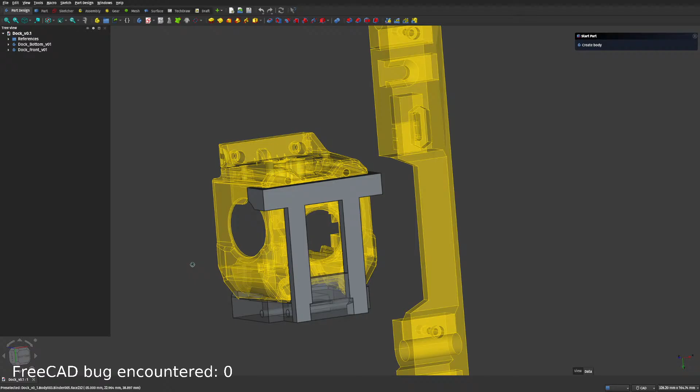Wow. Yeah, get rid of that. I can deal with this. Okay, now need to grab. Go with that, let's go with that. Put it over there.

Do I merge them? Actually, let's try that again. Let's try this, what's gonna be? I do have a backup plan.

Where's it from? Not ever. Unify. Apply. Fusion. Yep, that's good, so we're gonna get rid of these 2. Yeah, looking good. All that is merger. Merge. Mono, single piece. That was a cool sounding name.

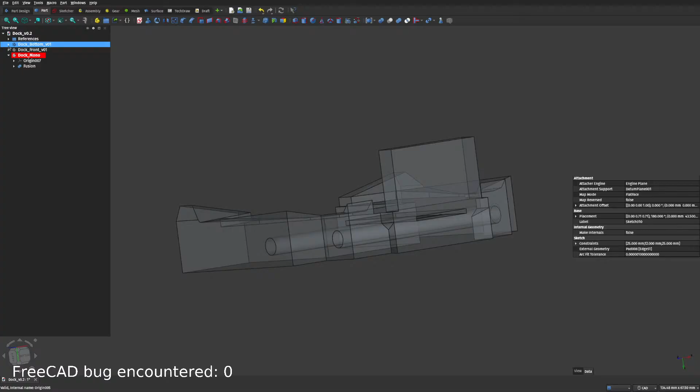to what, number one, and make it 30. Yeah. Dun, dun, dun, dun, dun. Let's see that way, put that one out. Yep, perfect. That way I can just mess with these two, and this one will automatically follow along, which is good.

Dum dum dum dum. I have no way to actually mute myself. We need it. Oh well. That actually could go bad.

What was that? Yep. That, I got away. I'm pretty sure neither of these actually on an angle. Or before that, make that 10.

And give myself some room to spin stuff around. Ooh yeah, like that, 9. And lower that a little bit. Okay.

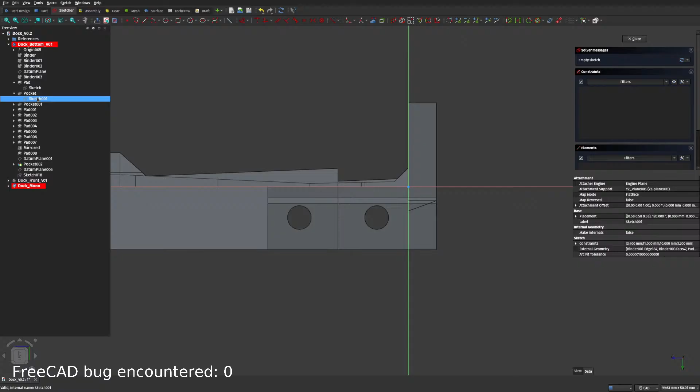Wait, how do you do that again?

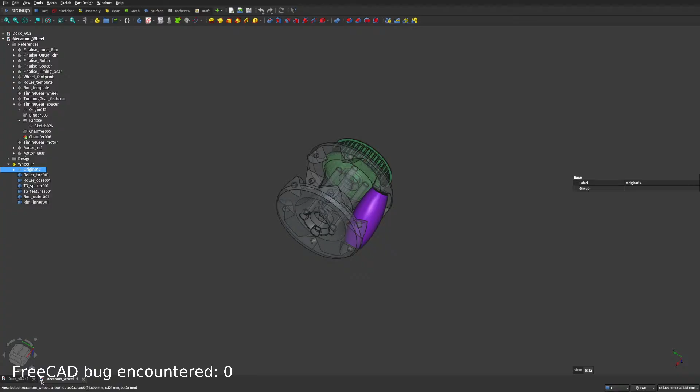For my case, though, I don't have a circle within a circle. I only have a circle at the very bottom. So I just do that. All right, that's good. All right, got it. I figured it out in the end. Okay, never mind.

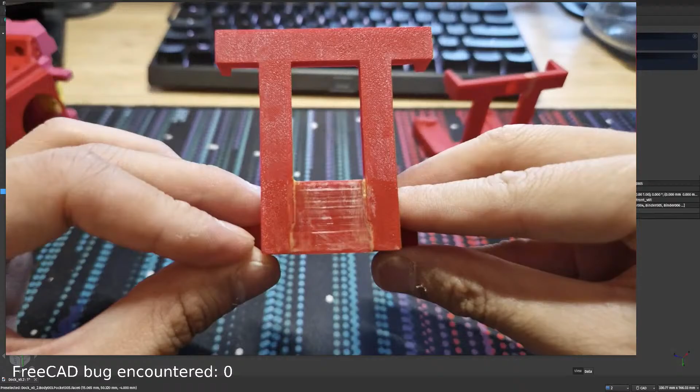So that piece goes on top of that piece. Those two are supposed to meet. And how they are going to be assembled together in the real world is basically just acetone glue. Well, acetone, not glue - acetone, but I put a bit of scrap ABS into it. So that's how this thing is glued together. Just paint on the edge, the interface, with a brush, and glue them together.

The problem with this thing is, as you can see here, these holes are not round, and that's a big no-no, unfortunately, because this thing needs to slide back and forth between two pins that go through this hole.

So yeah, I'm thinking maybe I can print this part still on its own, but in an orientation that will limit the amount of support needed for this whole structure, while still maintaining the fact that the hole you see here is a perfectly rounded hole. That's what I want.

Anyway, this is just a prototype. Speaking of which, maybe I should just print it out right now. Yep, so yeah, I think I talked myself into this just now. But let me go to the main screen there.

Oh, I forgot to add the slicer into this view. So give me a sec, need to capture the slicer. Prusa slicer. Okay.

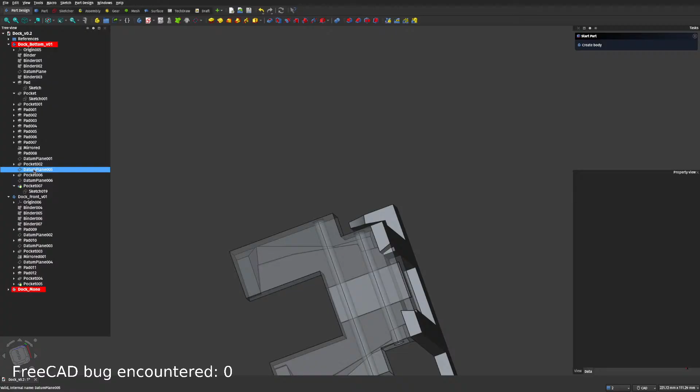So we punch that one through. The reason why we punch that one through is because we actually want— do we? Let me just think about this one really quick. Close, no, that one. Cancel. Yeah, this one.

So we're going to hold right there. It's less than 10 between that edge and that hole. So I don't mind, but I should be able to put a hole right there on that face without touching these two, right? Right.

Wait, but where do I want to go? Because the top is super thin already. Wait, no, that just shouldn't matter. Doesn't matter, and the reason why. Alright, so M4, 3.

I want to make a thing to clamp down the spring instead of relying on friction like it had been in V1, MissChanger V1. It didn't work too well in V1. I had to glue things in place after a while, which is annoying.

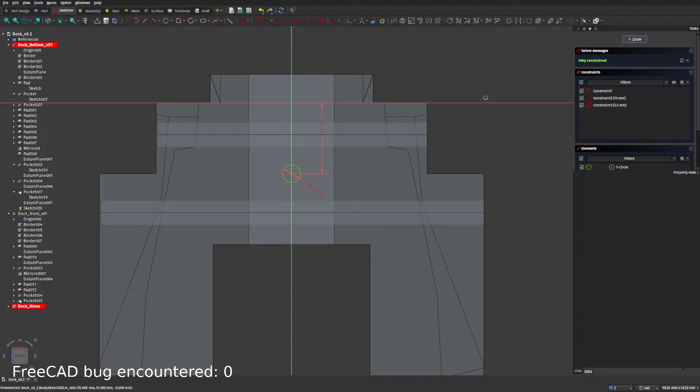Dimension. Make that in here, this doesn't have to be exact at all. Dimension that 2.5. In fact, I'm not even planning to punch a hole through using a normal hole punching. I'm gonna punch a hole with—

There's a police car outside. Hey, listen, it's better than the good old motorcycle road.

So that's better. Oh wait, no, that's still not better. No, clearance, correct it. No. And fine with tapped it. Yeah, they will, tapped it.

Hold up. Threaded, yeah, bro, yeah. 2.5, which sounds good. Yeah, 2.9. If we put 2.5, that means you have to cut the thread out with a threading tool, which is annoying. So let's not do that.

Now for the depth, it was 6.6, was it? 6. Oh, you need to be flat first. Flat. 0.6. 0.6 that, 0.6. It come through, right? Yeah, it came through.

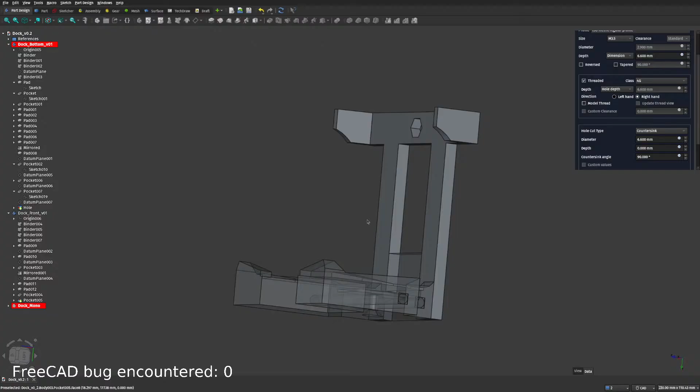Make sure to access the hole making thing first. Menu. Yeah. You don't want this to go up, I want this to go somewhere. So I'm going in the X direction. Plus 1, oh, -1.

Up to face. No, seriously, wrong one, wrong way. Are we going our first bug right now? I think I'm dealing with my first bug right now. Up to face, come on. Come on. Oh my god, it didn't take long, isn't it?

It's a bug, I can't extrude the other way, dimension. Reverse, no, yeah. Okay, up to face. Why would you not?

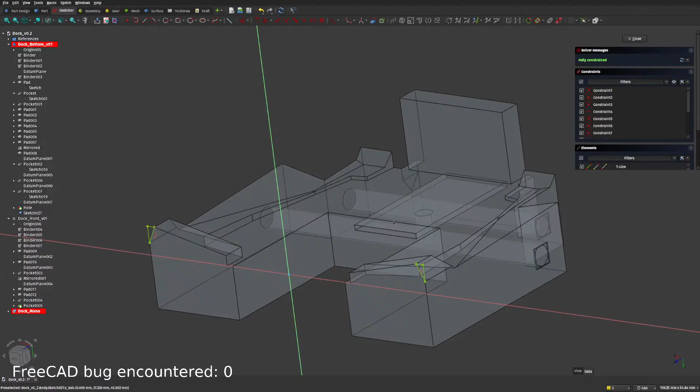What's this now? Alright, vertical. Damn it, no, I cannot do both at the same time. This one can go. Ooh, my, stop doing that.

That way, no, that way. Up to face, up to face. That face, there we go. Go, cool. Yeah, because there's 2 of these in opposite direction, so you can't.

Or should I? Can I mirror that? Just mirror that, I can't mirror that. But should I though? I don't want to, that sounds like a disaster waiting to happen.

Okay. Why is it on there? Is that not there? Oh, you screw you. Oh, wrong one, wrong one. Ow. Damn it. Steak.

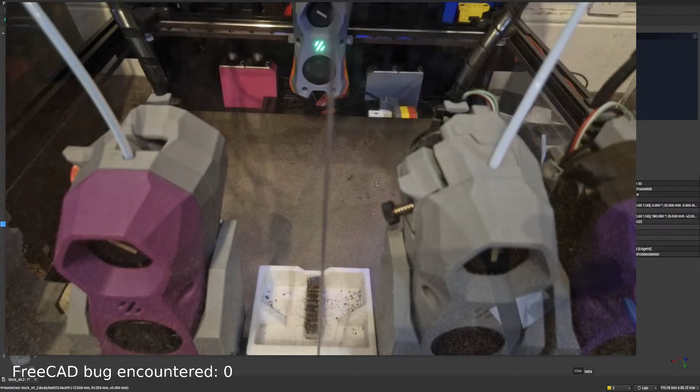Oh, thing is happening. Now, if I remember correctly, you can just go watch that while I keep doing what I'm doing.

Save that. I need to be 60. Okay, nice.

Okay, now, oop, I can see some problem brewing with the other. Yeah, no, that's good. Oh, all right, well never mind, it's doing its thing now. Yeah, heating up. Right, so while that's heating up, I'll just do this really quick.

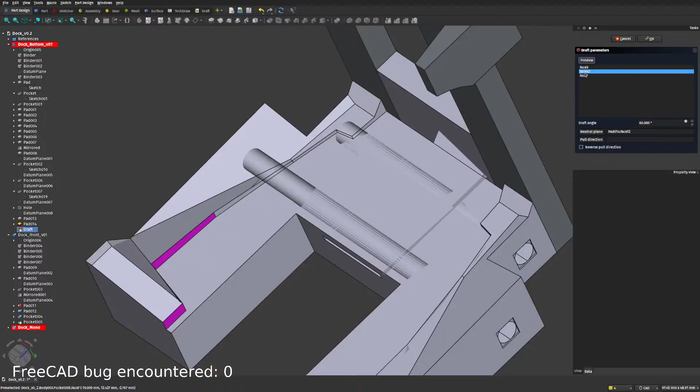Oh, it is doing stuff. Yeah. Alright, get back, get the team occupied. And now we'll preview this. Okay.

We deal with this? Maybe we could chamfer it. Just all around, mister. Alright, let me just watch it. Yep, it looks fine.

Yay, printing. Hey. Well, in case you're wondering about what I'm doing, I'm printing this thing here, the bottom piece. That's the plan for the next hour on that printer. Obviously, I'm not gonna have this display all the time, I'm gonna show up what the printer is doing with the cut. But yeah, that's that.

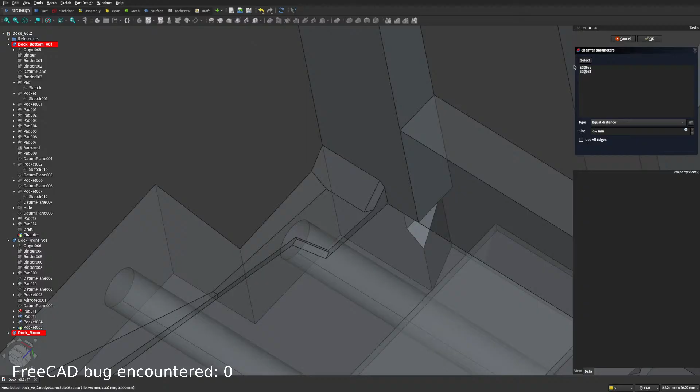Nah, small enough, let's not talk about it. But I'm not bothered too much. But I shall count that as a bug, because I cannot chamfer that edge there, right there. That edge right there, I cannot select and chamfer that. Which is stupid, but it's not critical. I can continue, but that's one point against FreeCAD now.

Alright, so like that on the edge as well, for symmetry. Perfect symmetry. Okay, that's not... yep, that's not.

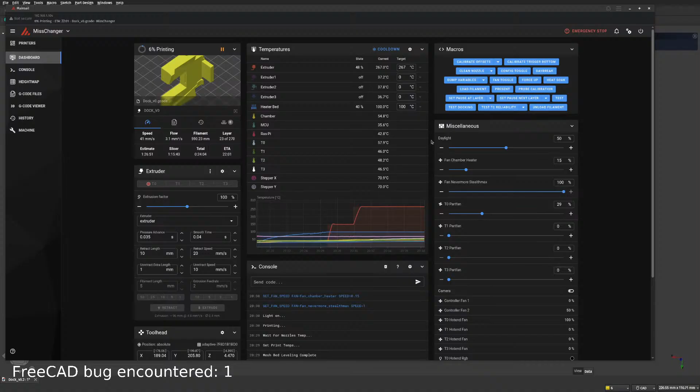Oh, cool. Right, this. That is out the way. We will do this thing here. Okay.

What? Yeah. 1.2. Did I see this glitching? So far, so good. Okay, good, I'm gonna grab that. Alright.

Select face. Yeah, okay. What are these? Oh wait. That one. Oops, oops, wrong face. Wrong face. You need to go to that one.

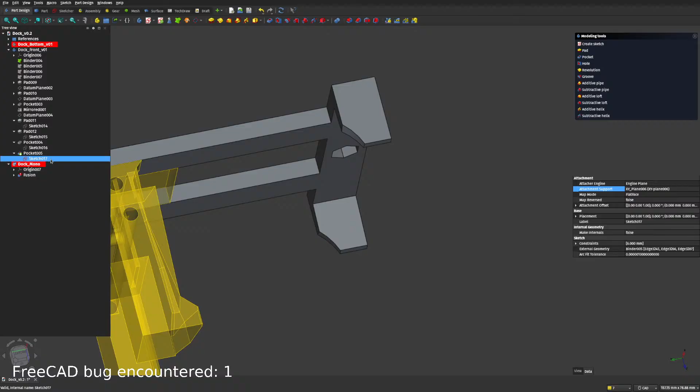Okay, looking good. After the triangle there, so that's fine. Wait, where's the cutout for that notch? I know it cut it already, but when is that? Oh, there you go. Yeah, it's fine, it's fine.

Right, so anything else I want to do here before I move on to the next thing, which is the thing that I'm still testing. Yeah, maybe chamfer this corner. Do I want to? Oop. Oh my god, I bought it. Yeah, that one.

Two, I mean, you look like ass. Yeah, I'll make it two. Keep it two, yeah. Trying to make it a little stronger, but without ruining this aesthetic on this thing. Okay, there we go.

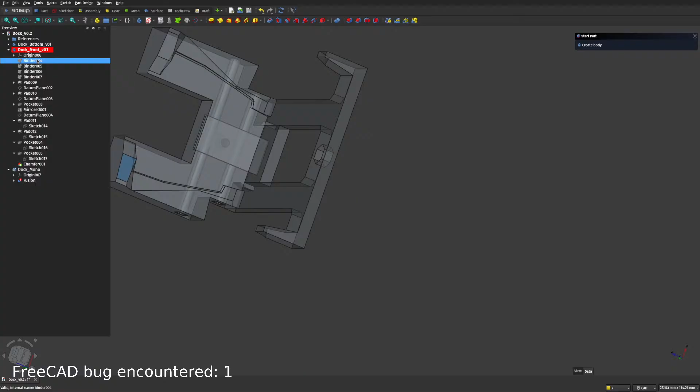And oh, right, totally forgot about this one. Also need to do that. Yeah, that one actually very important. That one is very important.

Alright, one mil is good enough. Do I want to chamfer the outside? No, I don't. We can do that, but not now. Yeah, we'll chamfer the edge of the face later when we really clear out. This is good.

Same time, that away. Why did this fusion break? I never used such tools in my life, so I don't know what's with this. I thought for sure that it would not break. Why are you broken?

Refine, true. Is this a bug? It's another bug, isn't it? Phase 2, yeah, all of them. Good. Why are you broken? Recompute? Okay. Recompute, what's this one? Recompute that one. No, okay. Oh, okay.

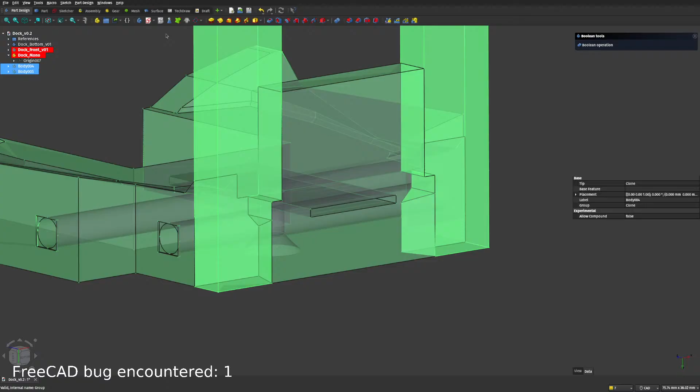Okay, so a boolean operation for you. Shit, alright. Whatever, we knew that, that's a bug. Let's lock it and move on. Yeah.

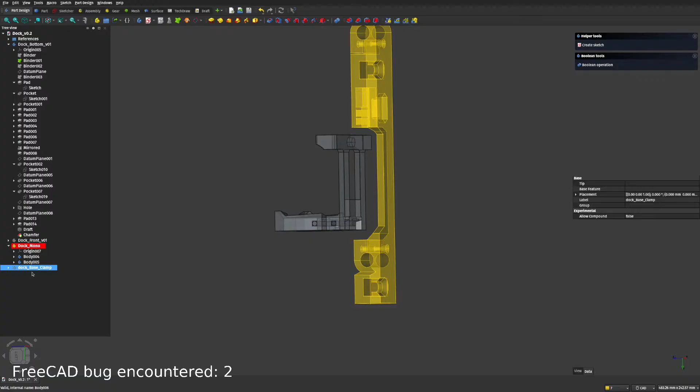Now we are, and we move that away, and that away, and that away. What I want from here for this guy is the holder, which I'm going to add in there. Oh wait, not from there, not from there, not from there. The holder, but from the assembly, yeah. Alright, yeah, that, like that, so it's positioned correctly on its own.

Then I want this one. Right out of the way. Do I dare to do this? Yeah, let's do this. Alright, so I'm gonna hide that. What's this? Ah, this didn't do anything. Okay.

Insert that. Alright, so grab that, and I grab that. There we go. Why did that? Okay, whatever. Right, so I want a little thing that connects right there, right beneath this thing. I'm gonna do that.

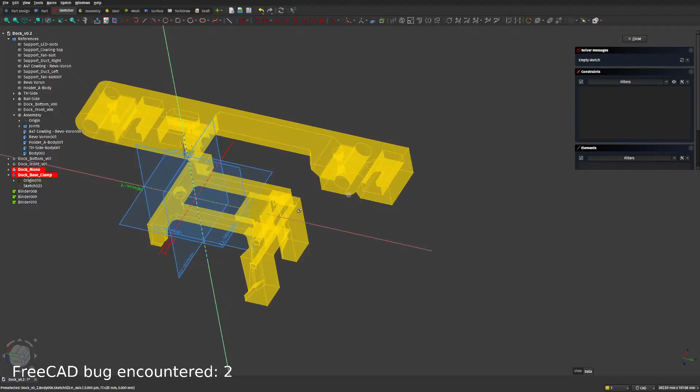Oh wait, no, why was it? Why was that outside? Oh, because I had this setup. Okay.

Correctly positioned. Alright, so before we connect the thing, drawing, wait now. Yep, something like that. There should be a pin in the middle, yeah.

So, and that, ooh my. Part. Up. I don't want this to be like that. Learn it the hard way. I don't want that. I want these two.

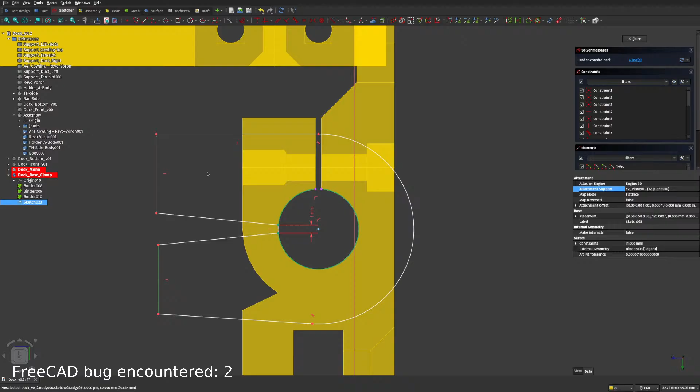Yeah, because if I extrude, because right now, if I extrude that, I'm just gonna have that really quick. And then let's show you what I'll do. Dimension that, yeah, just give it a random number. 10, yeah. Oh right, no, not yet. 8.

Yep, right. So the problem with this right now is in our design. If I can't, this is not going to print. Not the reason I'm saying that, because if I extrude this evenly, symmetry, yeah.

So the idea is something comes from here, I need to go up and attach to that one. Then it needs to be aligned with that.

Oh, this can actually still work, never mind. In fact, it makes things a lot easier the way that I'm going to do it. Let's get rid of that, get rid of that, get rid of that.

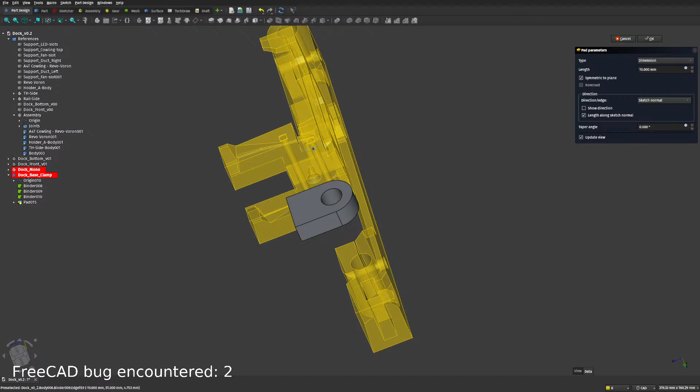Now I wish I had that camera back because I have some scribble going down. Yeah, no, I wanted to meet with this face. So that's 38, right? I think so. What is that?

I'm trying to avoid relying on this geometry. Set, close that.

Now, here is the deal. Because I need to make this thing a clamp, much like this at the back here, at the bar end here. We'll have the slot in between and a bolt going between them. That way it can actually clamp onto the round aluminum bar.

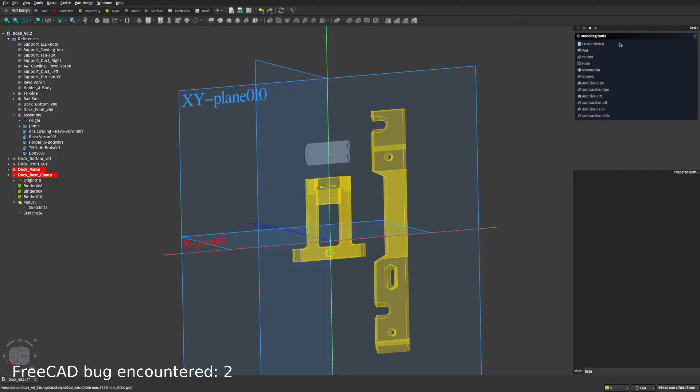Wait, it's not okay. Yeah, okay, so get rid of that sketch. The sketch is not gonna work. I'm gonna make a sketch here.

What does this look like out there? I think it's happening. Can't tell what the hell's going on, but I think it's happening.

Alright, where was I? Yeah, I'm gonna draw some stuff on here. So I need that.

Not sure I should do that. Let's see it. Second thought. No. Yeah, I couldn't think of any reason why this wouldn't work. So...

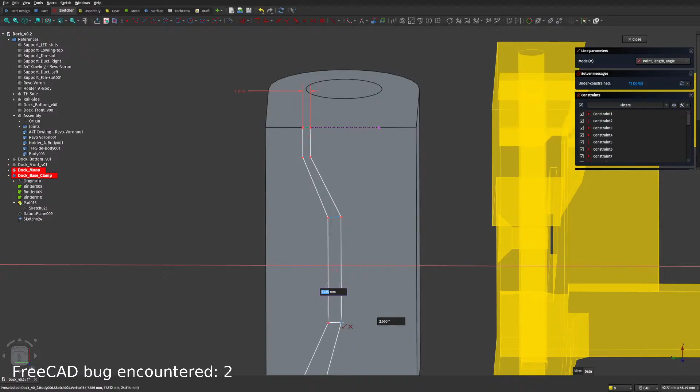Wait for one sec, I'm just gonna get it done quickly. So that...

Oh my, why are you? Yeah, 2, I saw that, but overall experience, pretty decent. I mean, I haven't quit yet. Haven't quit that yet.

Now what is constraint? 36, 34, 7. Oh, there's 2 of these, and it doesn't need to be. Oh, all right, there we go.

So, dun, dun, dun. Oh, what did I just do? All right, that was fine. And these, that one and that one, be equal. Now, there is between there and there, so I want to play with now.

And it broke. Okay, never mind. I will...

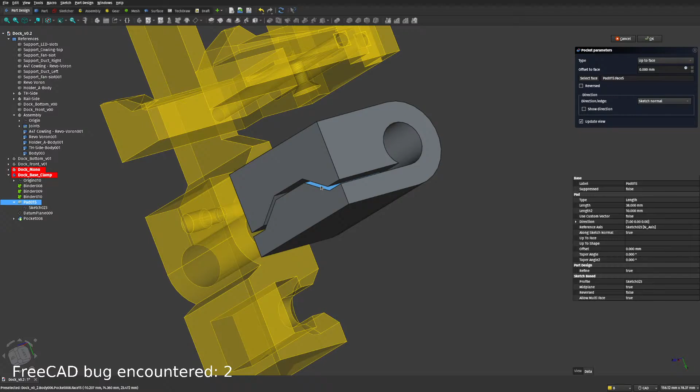And now I have second thoughts on having this edge only 5 mil, so give me a sec. Maybe 7? Yeah, wait, how many is this? 8. That's fine, plenty fine. That is plenty fine.

Okay, so I got that. I think it's almost done. It is. Yeah, only halfway done, never mind. Alright, back to work, back to work.

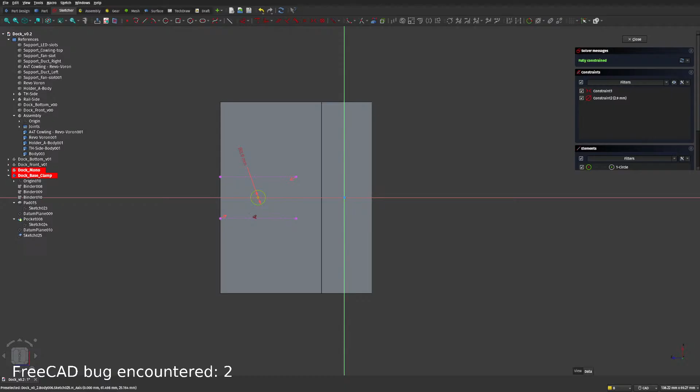Second thought on this. Dimension is 2.9, not that, because I'm boring a hole. Wait, no, I don't know, I'm not cutting a hole. Oh wait, no, I am cutting a hole. Make it 3 mil. 3.5, yeah, oh nope, not 4. 3.5 mil, alright, got it through.

Got it through. Cool. Cool, like that. And on the same sketch, create a hole. Can I do that? Cancel. Nope, okay, there we go.

Alright, and then the dimension of this hole should be that of a heat-set insert, which should be not bad. 4.5 by 5, 4.5 by 5.

I just hear something disconnected. What the heck? Oh.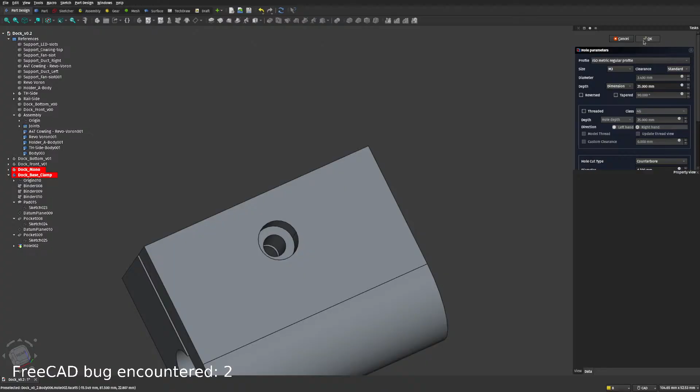Third, 3 mil. Yeah, around 3 mil, okay, that's good. So yeah, that is perfect. Okay, alright, so that is now our center block where everything else mounted to.

I just realized I don't want this to be center. Does it matter? Bring back the block, the binder. Bring back the binders. Alright, I want a hole here to line up with that. Actually I do have to do it from this side because this has a perfectly nice hole.

Alright, I would want to hide this top one for now. Okay. That. Okay.

So I want a hole here, kind of line up. Let's just hide that. That hole. Vertical. Horizontal.

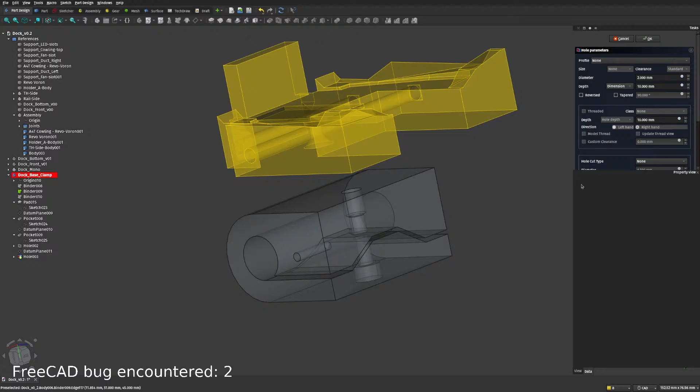There we go. So I want it to have an angle, yeah, like that. That way, when it prints upside down, printing from this end upward, it's not gonna cause too much trouble. Yeah, good.

Mirror that across the XY plane. Okay, that's that. But it's still a little weird.

So that line up with that one, line up with that one. We need it to space up with that one. Do we need it to space up with that one? No, not be.

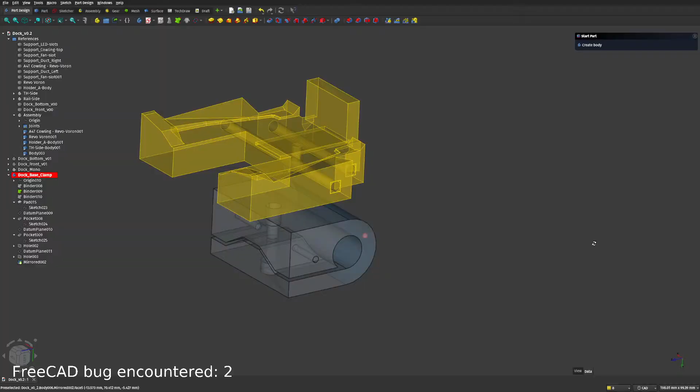Alright, okay, so anyway, so that's that. Put this back in place. I don't know what I'm looking at.

Don't want this at all. So then I just need to make two sticks connecting these two together.

Okay, make new body. This one is outer, inner. Let's call it inner stick. Inner... dock, it's something, it had to be dock something. Yeah, dock.

Stick one, inner stick. Why can't I think of a better name? Dock, pivot one, sound inner pivot. It's also uninspiring, but I'll stick with that for now, can't think of anything better. Pivot, yeah, like that.

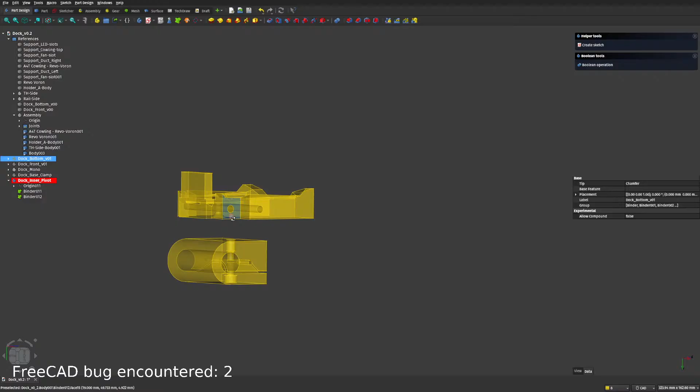I'll go for that one. No, let's go that one, because that shape is safe. That one on top is glitchy as hell. So we are making a surface, right? So that way, if something goes wrong, it goes wrong with the surface, and as long as I can fix the surface, everything else should follow. Key point is the 'should'.

So I'm thinking like that. Oh, boom. Alright, so got that, connector, align. Okay, now here's the million dollar question. Oh my, detaching this — how am I gonna connect a 3mm rod through this hole? Oh wait, I think I know what to call this thing now.

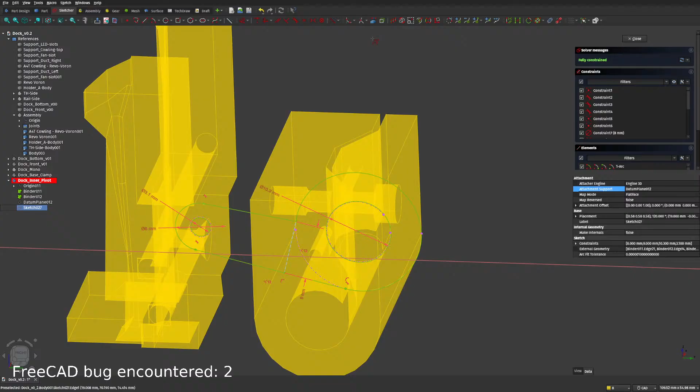Oh wait, no, I cannot have this connected to that. Alright, take that back. Oh, I can though, yeah. Alright, let me just bring that into the sketch so that I can manipulate that particular point. Alright, that's a — so there's nothing wrong with doing that, but I cannot.

So there's the 3 mil hole coming in. I need something to push the other pin outward a little bit so that I can meet with that. That thing needs to be about 8 mil long, so we cannot make it too thin. So I reckon...

Make that construction line, that spacer that we're gonna print out for that dimension, but that's 5 mil. Wait, the hole itself is 3 mil. Yeah, the hole itself is 3 mil. So if you want the wall to be 2 mil thick, it needs to be 7. Okay, maybe not 2 mil thick, 1.5 mil thick.

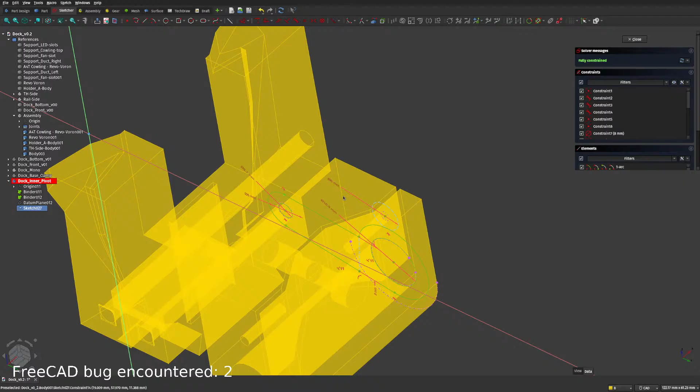I can put like a printed spring on the dock itself, with a latch to something on one of the pillars — oh, inner pillar, yeah. Alright, I'll just say okay with that first. Pillar. How do I spell pillar?

Oh great, Google is occupied. Oh, this is embarrassing. Pillar. Oh god, pillar is spelled P-I... pillar, yeah, like that. Screw it, I can always rename it at some other point. Yeah.

Extrude that, yep, okay. 8. 7.5. 7.6, yeah 7.6, give myself some room on both sides to maneuver. Interesting shape.

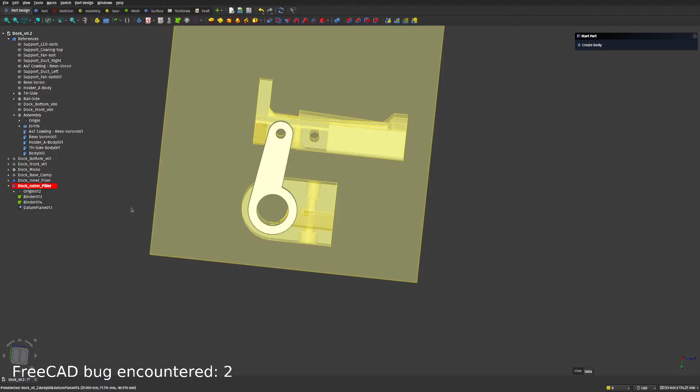Alright, let's try this, I'll do this really quick. 10 mil. Oh god, damn it. Maybe I make this thing smaller? Yeah? Could be.

Or I could just rotate it downward so that the spin goes up there instead of down there. It doesn't matter, doesn't it? Yeah, we could do that. Huh.

Okay, cancel, reset, close. Okay, we are doing that.

What's just that? Alright, oh yeah, no. So, yeah, we're gonna make the pillar first, then we'll make the spacer later. The spacer, it should be easy.

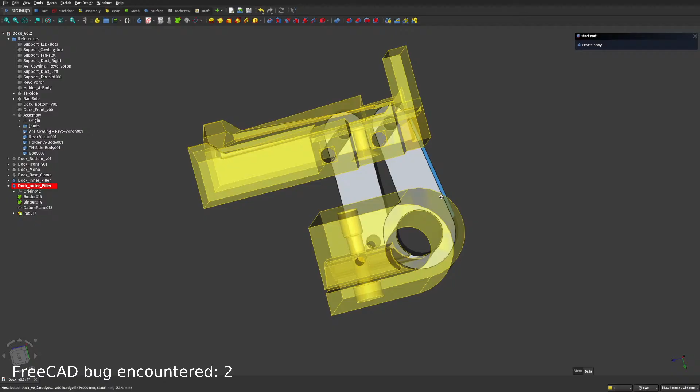Yeah, see how that goes. Things are coming together now. Okay. Alright, I'll deal with the rest later, because the critical point right now is actually with this thing. And that, not that, and that. So let's think this through.

Grab that. Make construction line. Make construction line. Oh my, there we go. What dimension do we have there? Okay, oh wait, no, I don't need the dimension.

I don't need a diameter, I need the mode radius. Cool. Alright, that's a 20mm radius. I only need what, 13? We can make this work. Come on.

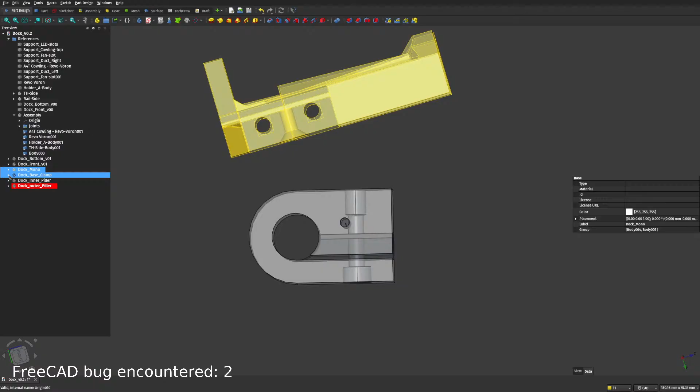Everything just tilts downward a bit, except for this one pin, because that pin is relative to that. I'm a genius. Okay, put out the other two. Oh wait, no, not that. Return the other two. The only downside to this is it looks like ass, this really does look like ass, and I slowly lost a sense of space just staring at this tilted block.

Let me do something really quickly, if I can. Actually, first, I was thinking I can just curve it down and make it horizontal, to make it look good, look flat with that one. I can do that, but not from the base feature, because we need that hole for the threaded insert. So I have to add more features to create that flat looking bottom. To make sure I'm not blind, let me put this away, put that out, put these two away for now. Now I can tell what is horizontal and what is not vertical.

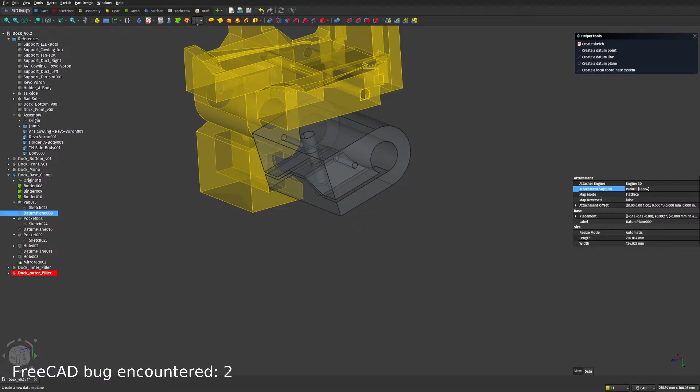Okay, just thinking about it a little bit. Oh, there was a datum plane right there. Yep, there we go. Do I need a datum plane, or do I want a vertical one? That's one, more fine, we can always trim it down. Oh wait, no wait, we made that mistake one too many times. Check in. Yeah no, okay, we're going with that one then.

Draw that. Now we grab that bad boy. Oh wait, no. Shoot. Okay, I take that back. Yeah, we may have to go with the side one. Yeah, let's go with that one. The reason, maybe, is I wouldn't be able to tell where to extrude if I were to use that angle. I don't know what that angle is, that's the big problem.

Put that away. Now I grab that. Draw a line. Up, down, down, vertical. And the distance between that and that should be 13. Yeah, that one. The distance with the... my print is done, one sec. 13. Alright, close. My print is done.

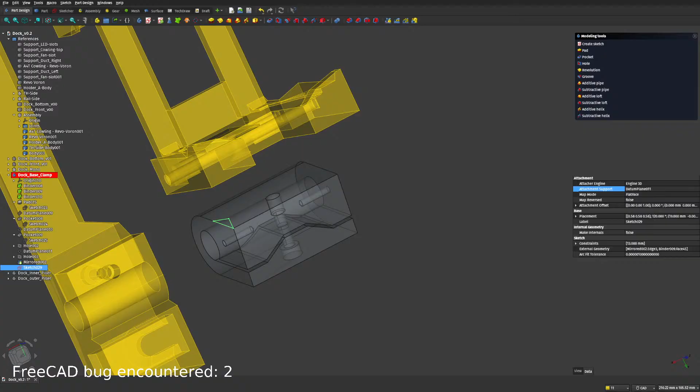So we're going with the model design instead of that. Anyway, back to this.

Oh, reverse. Make it aesthetic. Make it 10. Okay, that's good. That's good enough. And now mirror that.

Hold on, put that away. Rather than mirror only that, I reckon I can mirror both. Mirror that, both of them, through the YZ plane, like so.

No, not good enough. Cancel. So, because I don't want to put that as an overhang, what I'll do instead is this: put the neutral plane as that one, and put the number as 45.

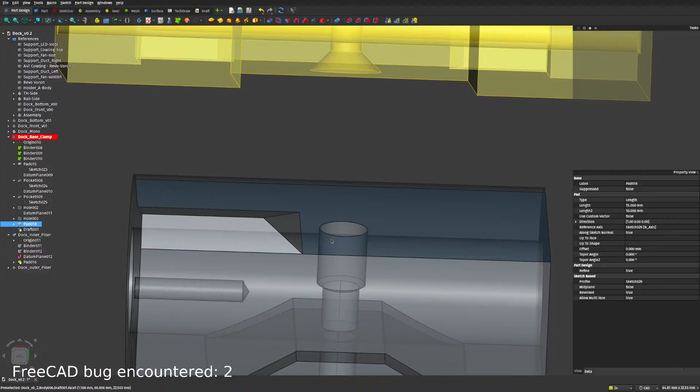So maybe I want to increase the depth actually. Make it 15. 15, okay, no, too far. No, it's fine, it's fine.

That, and that, that, and that can now be mirrored through the YZ plane. It looks fine.

Okay, maybe 13 or 12 or something. Yeah, maybe 13, lucky number. They look great.

Now, because I added an extra feature onto this prop, everything depending on it is now broken. Unfortunately. Fortunately for me, let's hide that really quick. I could attach everything to a datum plane, so I'll just go like that, say okay, and things should fix itself. Like that. Nice.

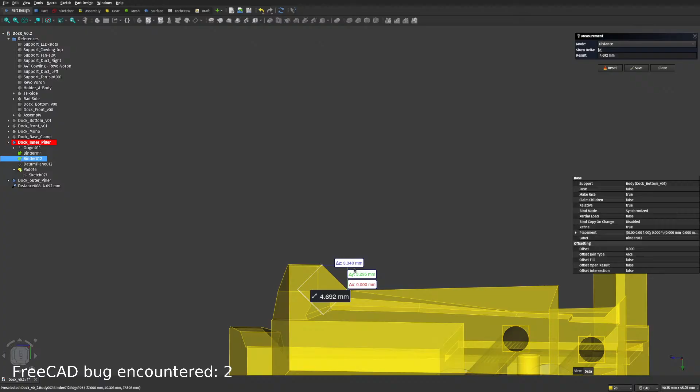It can be changed later, no worries, can't reset. See, I just talked myself out of actually doing any work. But that's okay, because I don't want this to tilt down more than it has to — it looked bad that way, in my opinion.

And also we have to deal with interference if this thing hits the bottom of a V2.4. Alright, so that's that.

Now before all else, we need to figure out how to lock this thing in place. Wait, no, actually, before even that, I need to make the little spacer for this thing. Oh, pillar — and yes, I am aware I spelled pillar wrong. I just do not know how to spell pillar, and I'm too tired to be bothered looking that up.

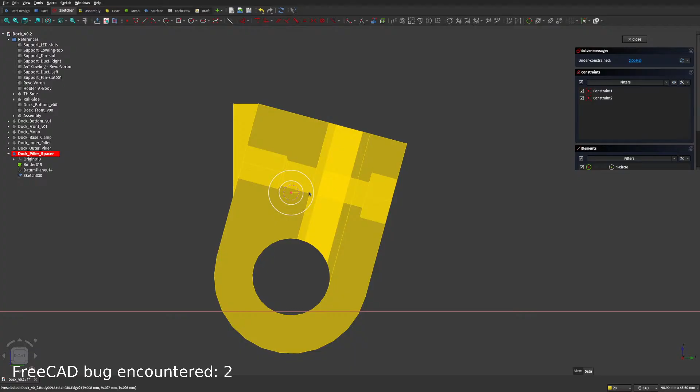Hole for the pin. A hole for the bolt. The other one is for the spacer.

Oh, I got an Amazon delivery. Don't know who it is. Just collected it, but I'm gonna grab that later.

No, don't make that equal. That one can be a 3. Dimension, make it a 3.2. Yeah, let's go for 3.2. Why that one and that one have so much different? Oh my god, why is that 2?

Really, you idiot. Alright, need to fix that later. Dimension, make that a 5.5. Out of curiosity, I need to figure out how thick this is.

Vertical, it just glitched on me. No worries. Vertical, and go through there. Collide. And what's that in the middle?

1.15. Okay, how much of that in terms of layers? No, of line width. 1.15. Nope, one sec. 1.15 divided by 0.4.

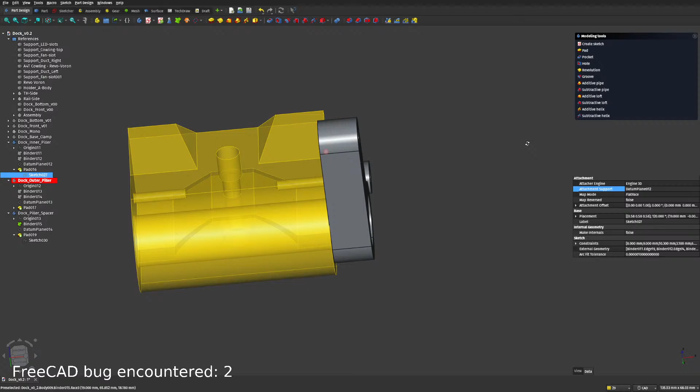Which direction are you going? Yeah, that one, that's good. Okay, so if I rerun that, it should now give me a 0.2 mil gap between that and that. Nice, nice, nice. Oh, and that.

Oh, sure. I need to find that. Dock base clamp. Dock mono, yeah, that one was fine. That's what it's looking like right now.

Now, there's a reason why I didn't build this into the spacer, because this is the point where the script, there's no script to have anymore. How am I gonna lock this dock into place? Right?

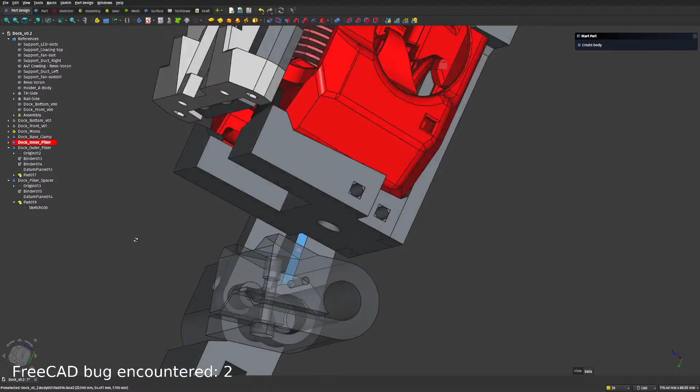Oh, that's simple. Yeah, this is actually pretty simple. Just make a notch right here. Make a notch right there and there. And yeah, make a notch right there. So when this thing slides to the left, slide towards the left, it will slide onto a notch and just hold it in place.

No, it doesn't have to be a notch. It could be a pin, right? The reason why I hated the V1 in the first place was because the notch is made out of plastic, so it had to be like 5 mil thick, which is annoying because that 5 mil is 5 mil that could have been added to another tool head.

But if I make a hole, just a hole, rather than just a straight bar like that, I could make a hole through there.

Where's the outer? Outer, yep. Hide this. That. I just need this, and I need... Oh, where's the... Am I blind? I have a feeling I'm blind. Oh yeah, it's the pillar. Okay, I don't need that. I need this, and that's the one we're working on.

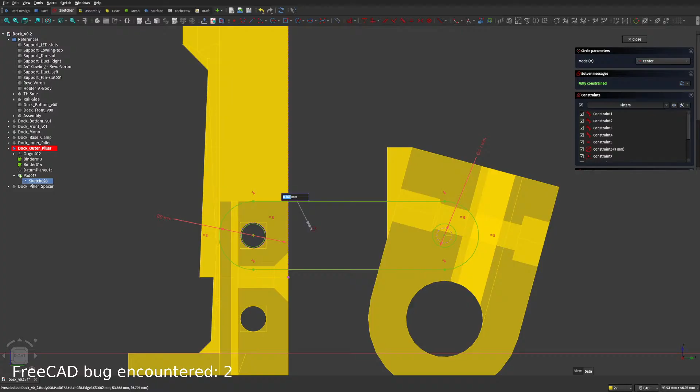So the way I think about doing this is just to add... oh my god, first and foremost, bring this etched-in feature to the sketch. Then I'll need a construction line right there. Put it there.

It'll tangent to that, and then tangent there maybe. When this falls down, when this goes down, it will go, this point's gonna go there. So we want this to be around that end of the thing, right? Let's draw a line here. Yeah, so we want this.

So if this pin is on the left of that line, at the bottom of that line, it will stop the thing from collapsing, the trapezium from collapsing, and stay in place. It will lock it in place. It will be on that side. It will do nothing because that point will move. That side of the edge gonna move away from the pin.

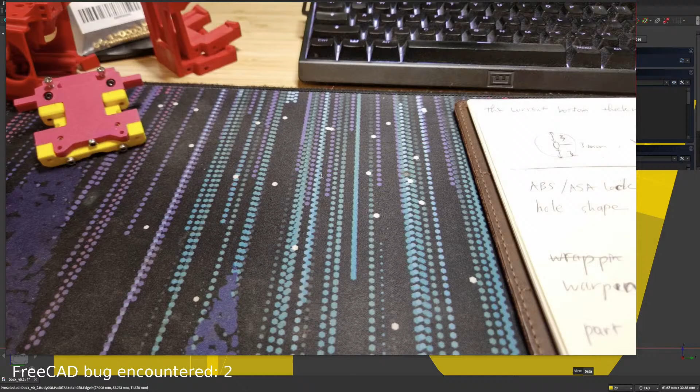When it comes down, I'm gonna press the screw towards that line. Yeah, so the driver's gonna push, the axle of the force gonna push that along that line there inward. So that edge gonna be a little thin. It should be fine no matter how heavy this is. And there's gonna be, what, 2 of them on each side. Oh I know, 2, yeah, 2 of them on one side.

Should there be 2? Well, we'll do that later. Oh god damn it, I didn't get rid of this. Alright, so yeah, right, just to recap. But okay, right.

Let's recap, alright, let's just think about this. That's the line of action. Oh no, that's the neutral line. On top of that is where the base gonna move away from the pin, and on the bottom is where the base gonna rest against the pin. So that's why this had to be here on this side, and it had to be in tension with the base so that it's in place. Oh, very straightforward, isn't it? Alright.

But that's that, we bring back all the other stuff. Let me just move other thing around here really quick. Hold on.

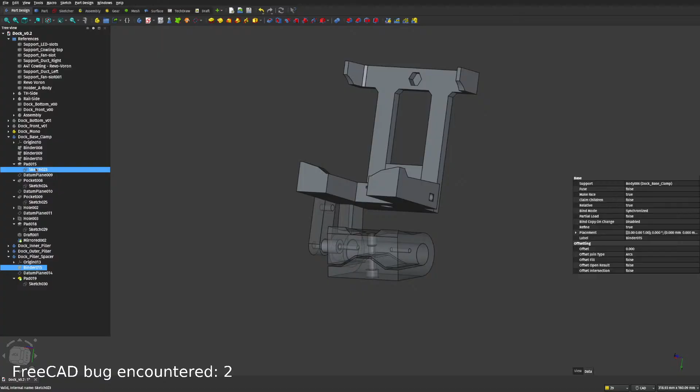Alright, so base, put in 8, and what, 3? Make it, yes, 3. 3.5. 1, 2, 3 and a half.

Did I break anything? I did, damn it. Can't even blame the computer for this, cannot even blame the software for this, my bad. Get rid of that as well, let's focus on the thing that is broken. Look at that, that's good. Look at that, that's good. Oh, random, right.

Okay, so go all the way to that final one, like so. Now I'm pretty sure at least one item is broken. Why are we not seeing anything broken?

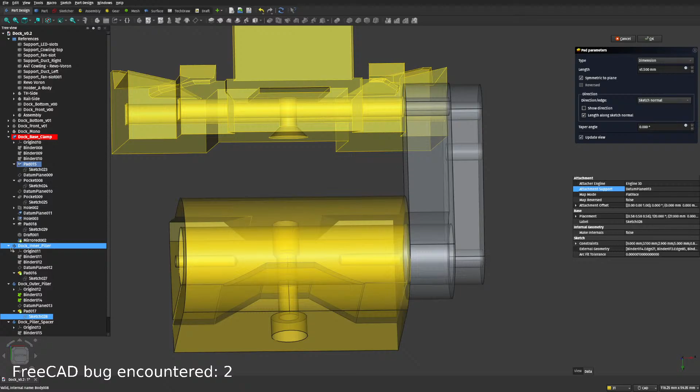Alright, so think about this. Not bad, alright. That one is attached to that face there. Wait, no, why is it still parallel to that? That's my main other question. There's something broken. Something must be broken.

I'm not paranoid, something is broken. There we go, took a while, but it... yeah, let's see, it's finally updated itself. That is fine, because it was part of the plan. That's not a bug, that actually is a fix, as expected.

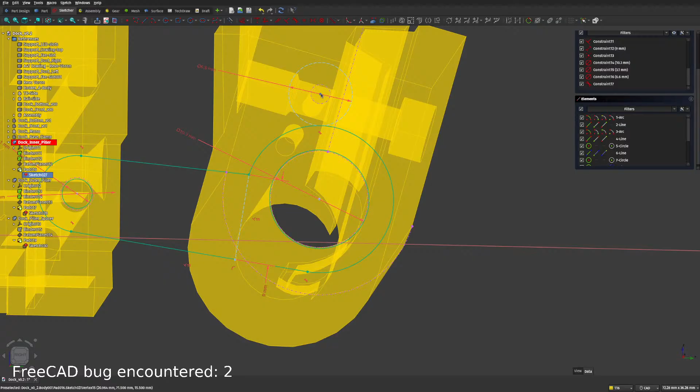Malformed constraint 16, yeah, something is off. I don't know what is off. What the heck? Alright, just gonna... ooh, there we go. Ooh my, right, I see it. It's this thing here, it's no longer locked down to anything. Collide. And oh, it's now right with the universe.

There's that. Anything else I need to keep an eye out on? No, okay, it just won't have a hard lock data point, so it doesn't really matter.

Is this stock FreeCAD or do you have an add-on installed too? I have the gear add-on, if you can call that an add-on, but that's pretty much it. Everything else is bone stock. That's done deliberately because I want to make sure I got the most stable experience out there. FreeCAD itself is already unstable as it is, so I don't want to give it any chance to get any more unstable.

That way, 1, 2. This is a tricky, annoying one.

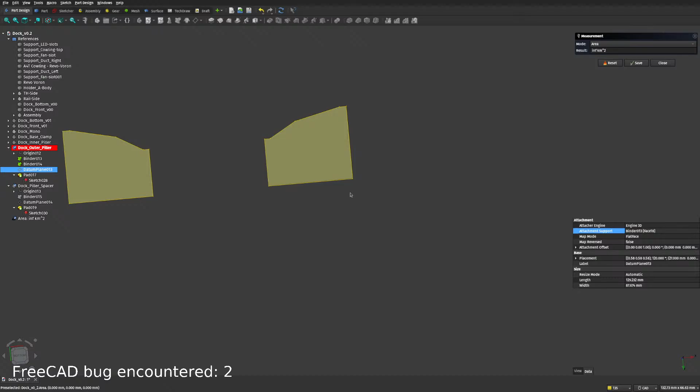That and that, how much in the Y is that? Oh, in the X we're talking 1.75. So we want to push that datum plane now 1.75. No, reset, close. Oh my god, what the heck is going on? Oh wow, hello, hello.

And now nothing is showing up. Great. Oh, there you go. Put that back on. 1.75, I want that datum plane to be offset. Oh, really should have made that visible to the naked eye before we do that. 1.75, okay, there we go.

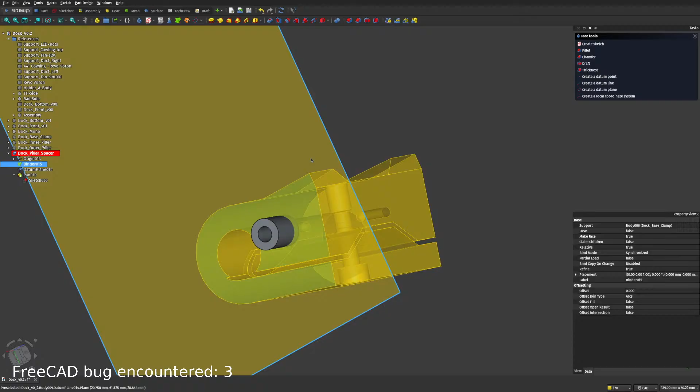Oh no, cancel. Select that plane, wrong plane. Okay, and then I find that. Put that there, close. Not working? Oh yeah, same problem. Same problem.

Yep, yeah, I don't know why I don't like that hole, but right, close. Oh, I know something to do about that. Oh, god damn it. Alright, let's hope this doesn't break anything again.

That hole, yeah, that hole, maybe. Yeah, that hole, that hole needs to be 2.9. Oh wait, oh yeah, because I made it a hole, so the drawing itself doesn't matter. Need to do that instead. There we go. That way, that hole is exactly 2.9 now instead of what it was before, which is 2. It's wrong.

Now ooh, what is that? Like that, like that. Like that, a base, give me a base. Get at the top. And right now it doesn't look too good because it's floating in mid-air, and I'm not gonna waste my time cutting in a pin, you just have to use your imagination, as there's a pin running through these two. And I may or may not add a holding pin here as well, just in case.

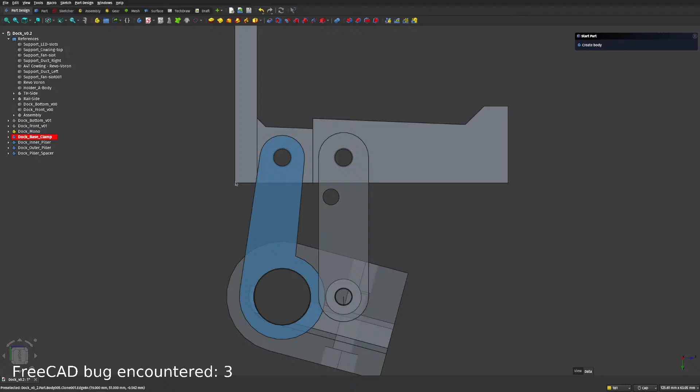Yeah, may want to do that. Let's do that. Trying to think for a sec. There's that one there to hold that back bit. There need to be another one here. Oh, pillar and a pillar and a pillar. Oh, why something just lit up?

There we go. Need to draw a line of action, these two points. There are so many potential problems here. Let me just cut this out really quick. Just do some math. Yeah, let's do some math. By math, I mean I just go into start drawings and hope for the best.

So this, I need to know this angle, dimension. Give it a reference, minus 54. And this line down to it. And I want that, vertical. And that line, what's it? That dimension, I want that to be 13, lucky number. And I want to know what this dimension is.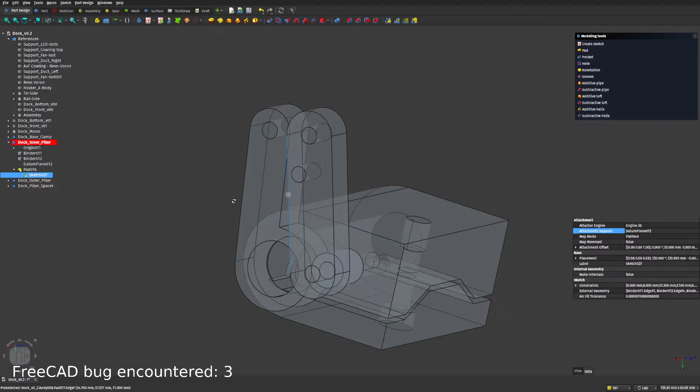Well, there, though, look like an ass. Whatever, not gonna bother. Close that. Oh my god, give up on this. The reason why I'm doing anything in the first place was because I was trying to do this. But damn it. Darn it. No, something right there, right?

Okay, let's get rid of that. Grab that. I want a line between that, that and that, and either. I want the dimension. Okay, but I want these two to be equal. Cool. And I want 10. Wait, no, not this one, don't need to be. This one needs to be a variable. Yeah, distance between that and that dimension is 13.

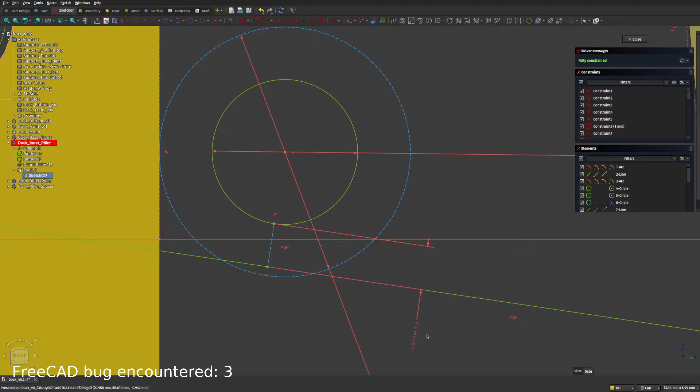Oh, I can see. I can smell problem brewing with this thing already, given how goddamn interconnected it is to that one base feature. Normal. And go through that. Hit 1.2. 0.8. Alright, I think that's it.

Oh, right. Oh, webcam, I think I haven't - oh, turn the mirror back on. Yeah, there we are. That should solve it. Oh my god, that did not. Something broke, I didn't realize.

Oh, what the heck is going on there? My pocket is broken. My pocket needs to be fixed. Up to face. Oh. That's annoying. Okay.

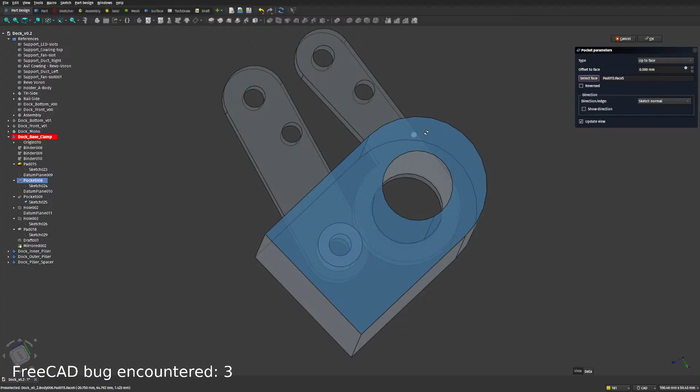Wait... this can solve a problem. Dimension, dimension 20. Okay, so that pocket can go by the dimension of 20.

20, and there we go. Oh, and something disappeared. Alright, yeah, that's perfect. And it broke everything else. Fuck.

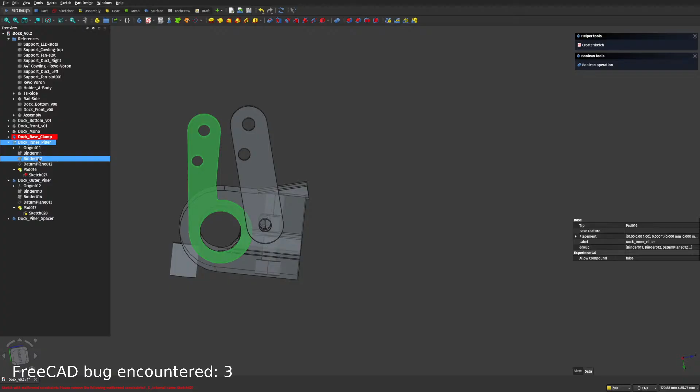Ah, back to fixing shit. Okay. Nope, the face is wrong. Random line, oh what the hell was that? No, that feature is wrong.

Go back even further. Need to fix that first. Oh yeah, it's not happy. So just grab that line, get that aligned. Align, alright.

Alright, I think that should fix that. So I can get rid of that now. Go back here. Oh no, not bad, wrong one. Still wrong one. Hello? Oh right, get rid of that.

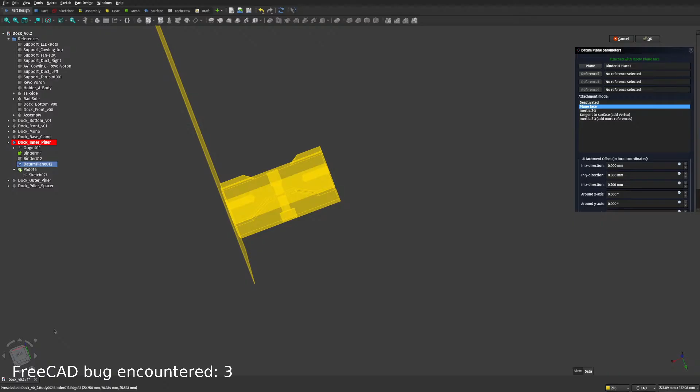Oh, it's fixed, so okay. No it's not... sort of it's... oh wait, huh? What's going on? I mean, do I agree with what's going on? No, I do not understand what's going on, but it worked, it worked. Not gonna argue with the result.

That's that. The only thing left now is for me to fix this again, because I found an opportunity to do better. I don't think I should add to this pad though, yeah, I don't think I should add to that. Instead, because it's a feature on top of that other feature, right? And that one too.

So I'll grab myself that one, and oh right, and that one. And yeah, I think that's it. No, that one, that one. Okay, and that one, okay. Hope that didn't go through the mic. Okay.

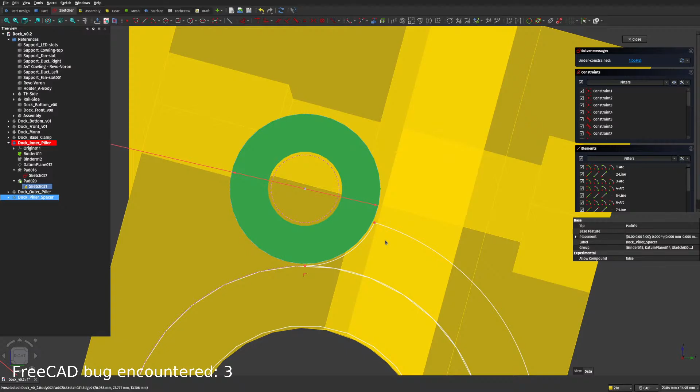Okay, so what we want, write that now. So now that I know that is correct. Well, I knew it's hiding somewhere. Okay, just hug it. Now I could go and check the actual dimension. Oh my, don't do that.

Okay, can't do that. Alright, if that circle becomes tangent to that circle before it equals the diameter, it's going to cause a problem. So I need to add a straight line here, that way. This can be whatever it wants. Yeah, like that, it has an edge to work with.

And now I can just grab that, make a dimension out of that. Radius? No. Diameter? Yep, diameter. 6.4, 6.4 it is.

Close. Oh wait, no, there's something not finished. Oh right, we need to deal with this. Make that what, 2? 1.8? Yeah, let's just make that 1.8. There's no harm done one way or another. So when it hits that pin, it's gonna be at an angle instead of just a little point that's gonna wear down quickly.

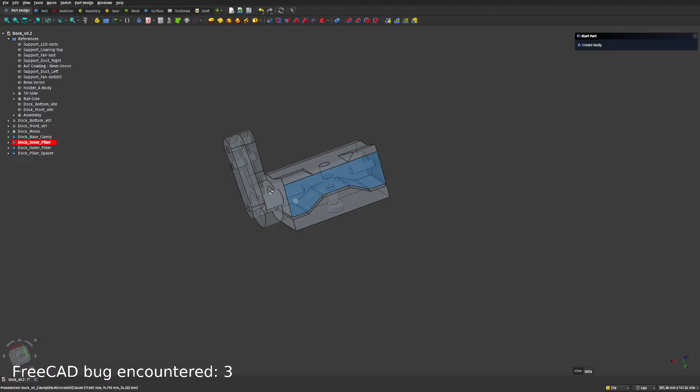I want maybe one more bit of meat on that one actually. Yeah, there's no harm in doing that.

And now that I have figured out the pin on this thing here, I should have plenty of time to play with that. Oh okay, come on, almost done.

There we go. Yeah, there's not much to be worried about here. So I'm just gonna grab that, draw a sketch there, between them. Oh no.

No, I don't need that either. Okay, something like that. Okay, grab that, make a... like that.

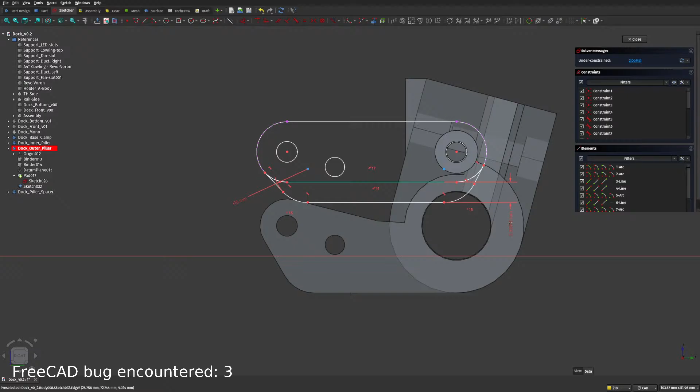Two more mil? Yeah, you could just add 2 more mil. There's literally... and now I'm just going to, yeah, something like that. Dimension 900, yeah, like 102. Make it look good, same with here.

Okay, actually there's one way to test it really quickly. That is, I measure the distance. No, it's actually not, doesn't matter. I'm looking at the right now. Yeah, it doesn't matter, it does not matter. Close, but anyway, we settled on that.

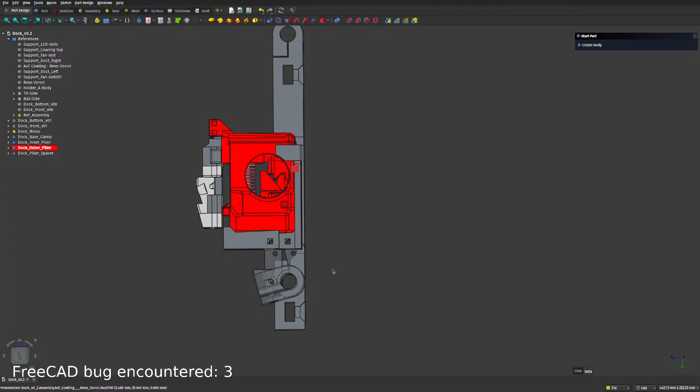That one's... wait, did that one pop out of the... oh. Oh wait, hold on. It could just be... I mean, it's not a big deal. It's not a big deal.

Oh yeah, okay fine, it's fine. Yeah, so... if we change it now.

Yeah, so I give this Voron a 0.5 mm on both sides in case something wrong could happen. But obviously I forgot to do that with this thing, so I need to do it now. Maybe, we shall see, let's see how.

And so, get rid of that. Oh wait, no. That's a 13. Where is the thing that... wait, what determined that diameter? Hello?

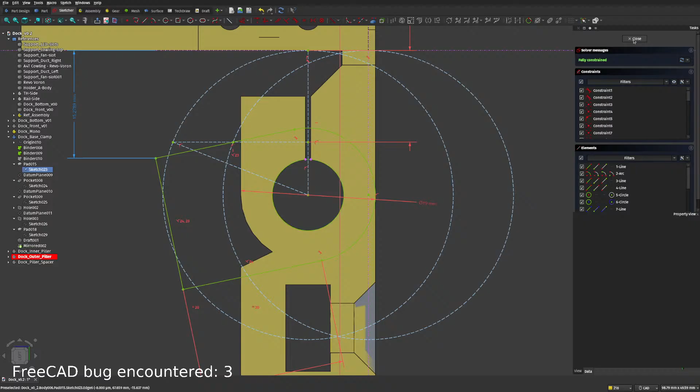And now I'm gonna break everything. Watch. Oh! Holy shit, didn't break anything. Hallelujah. Alright, I handed it to FreeCAD on that one. I got that one working right. Okay.

Alright, so let me estimate really quick how big this is gonna be. This is 14, and that is 55.5. So 14 plus 55.5 gives me 69.5. And I know for a fact that on a 350 Voron there is 410 millimeters of available space to add this stuff in.

So I don't think that bar needs to be that thick on the other side of this, so I may not even need that to be that thick. Yeah, anyway, so.

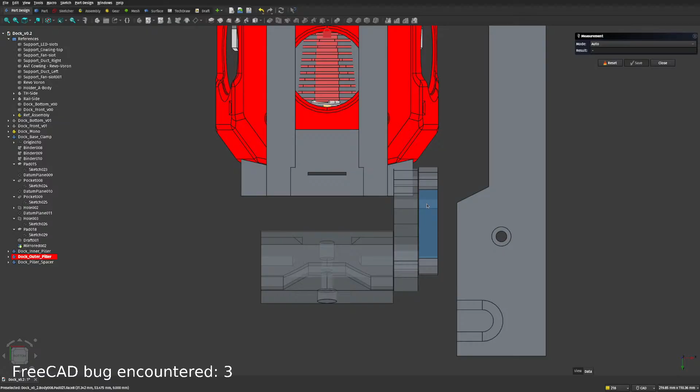Trying to see if I can make it even. Six, 2 mil. Yeah, 2 mil. So I need to just decrease this, reduce that distance within there and there by 2, and I should get it. So that can be done by just making a reset. So by making this thing 2 mil shorter, make it 4, which is a little bit close, too close.

If I can get this to work with 4 mil, I can fit 6 toolheads on a 350 Voron. Is that what I'm trying to do here? Wait, can I? 12 plus 5, 5, 5. Oh wait, no, cancel. No, I don't think so.

This toolhead is 70 mil wide. There's no way you can fit 2 plus there. Yeah, I took that back. Yeah, reality reverse, goddamn head. Okay. So there's no way we could fit anything in there.

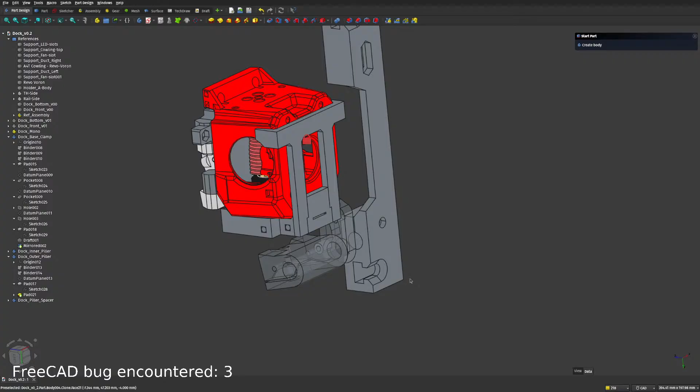Hopefully by the next stream I can have some prototype of this in the printer. Maybe I can make one on stream. And...